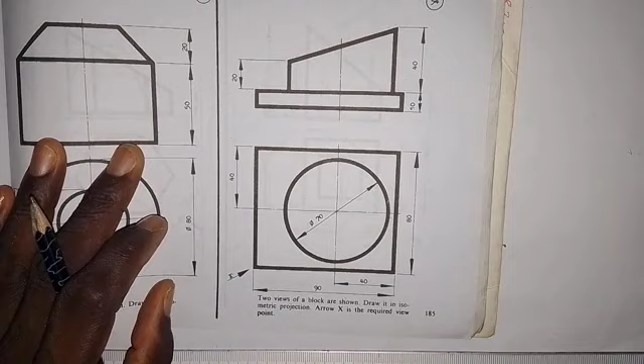Here I'm going to explain how you can construct the isometric view of this object, as we are given the orthographic views of the object. We are told that two views of a block are shown. Draw it in isometric projection. Arrow X is the required viewpoint.

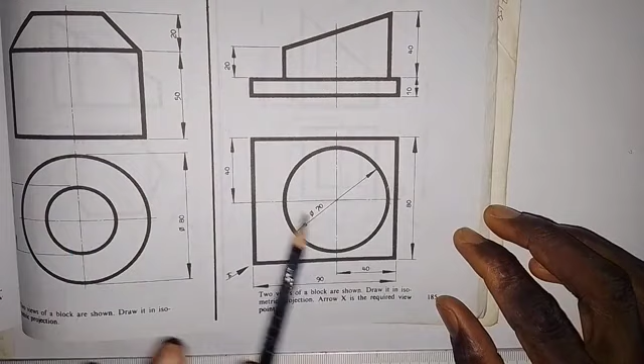So we are going to put this part together to get its isometric view as we are instructed. This is the front elevation, this is the plan. That means the views are given in first angle orthographic projection.

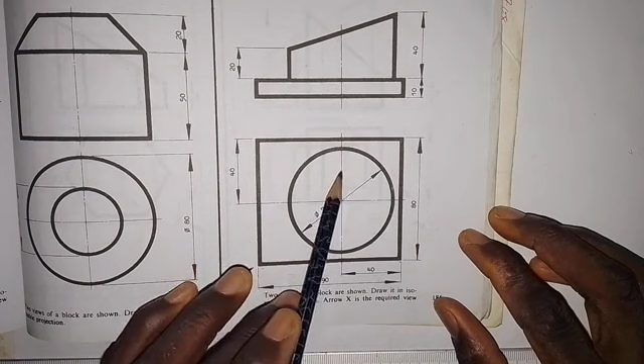Let's look at the dimensions. So in the plan, we have distance from here to here to be 80 millimeters, and from here to here is 90. The center line of this circle from this end is 40 millimeters. The center line of this circle on the horizontal part from this end is also 40 millimeters. So those are the dimensions that we have in the plan.

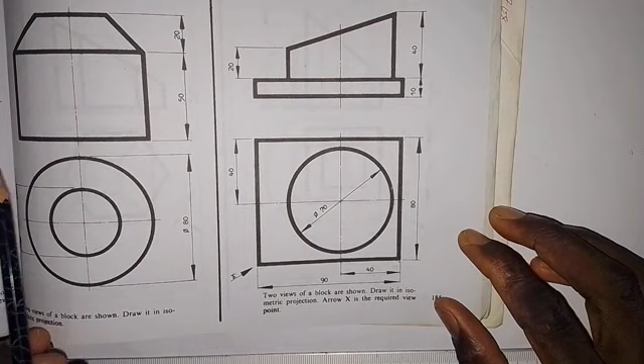The thickness of this is 10 millimeters, and distance from here to here is 40, from here to here is 20 millimeters. So we are going to put this part together to get its isometric view.

Now let's start. The first thing we need to do here is draw a horizontal line. Then we take our set square and draw a line in this direction, and turn to this side and draw a line in this direction as well. Then we turn like this and draw a short vertical line. So we are preparing the base first.

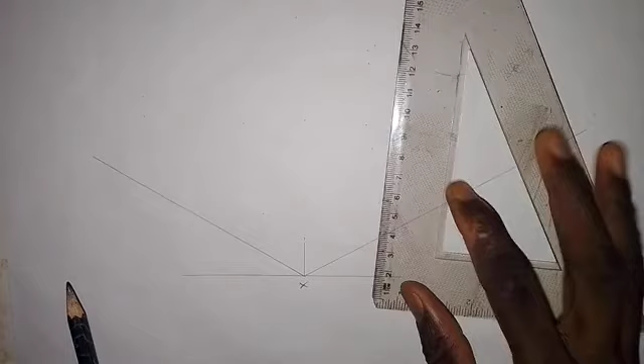So we take a measurement of 10 millimeters from this point. This is point X, which we are asked to take as the viewpoint. So we take a measurement of 10 millimeters up. And here we take a measurement of 90 millimeters from here. This is 90 millimeters.

Then here we also take a measurement of 80 millimeters from here. So this is 80 millimeters. Then we are going to draw a short vertical line at this point, and we also come here and draw a short vertical line at this point.

So then I will transfer this 10 millimeters to this side, like this, and then we also transfer it to this side from here like this. Then from this point we draw a line in this direction, and from this point we transfer this point to this end here. So we have drawn the base as we are given here.

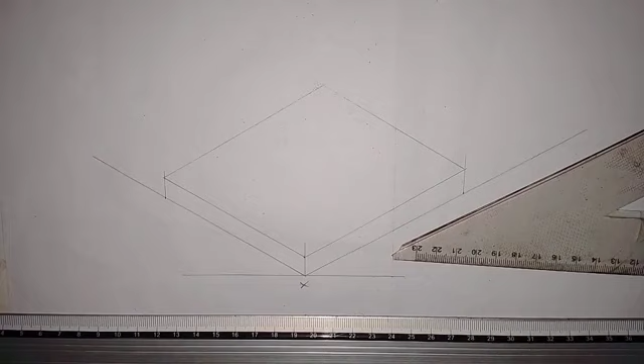Now let's prepare how we are going to draw the cylindrical part that is truncated. What we need to do now is take a measurement of 40 millimeters from this end. This is 40 millimeters. Then from this end here also we take 40 millimeters.

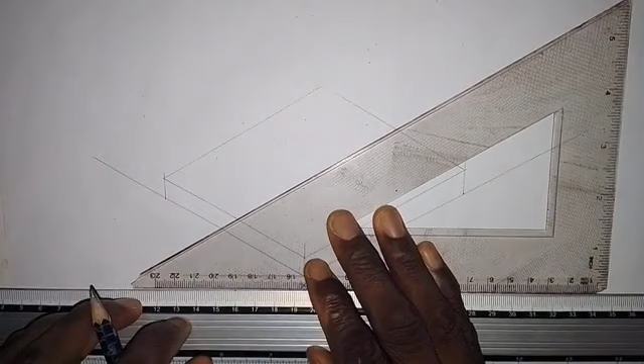This is 40 millimeters. So now we are going to draw a center line, from here to this end. Then we also do the same thing from here, where we have this 40, so we draw from here to this end here.

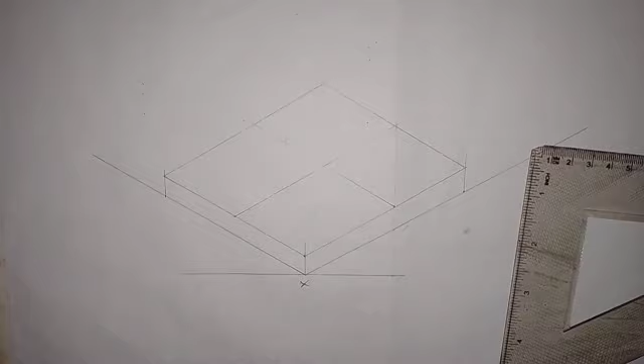Now for the cylindrical part, the circular base of the cylindrical part is 70 millimeters, that is, the diameter is 70 millimeters. So on this line here, we are going to take a measurement of 35 millimeters from here. This is 35 millimeters. So we also take 35 from here. This is 35 millimeters here.

Then we turn to this side and do the same thing. We take a measurement of 35 millimeters. So this is 35 millimeters. Then again from here, so this is 35 millimeters.

We are going to create an isometric square on this face. So look at the way I'm going to do it. We draw a line here, and then come here, we also draw a line. Then we turn it to this side.

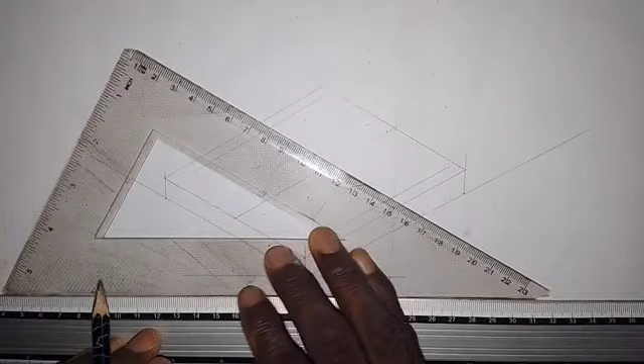So from here, we draw a line. Okay. Alright, so then coming to this side here. So from this point, we draw a line through this point. So we have the isometric square. So what we are going to do now, we connect the longest corners together.

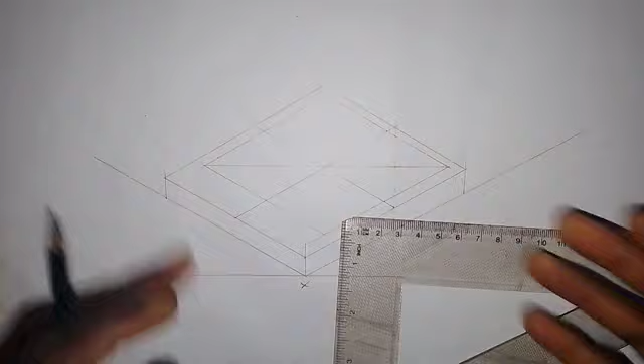So what I want to do here is to draw a part of the isometric circle at the base of that cylinder. So then we also connect this point here together with this point. So I will draw a line from here to meet this line, and then I will draw a line to connect this point and this point together, like this.

So the next thing that I'm going to do is to take my compass, setting it at this point. Because it is the lower part of the cylinder, I'm not going to draw the whole of the cylinder, but I'll just extend to this point here. Then I will draw an arc from here to here like this.

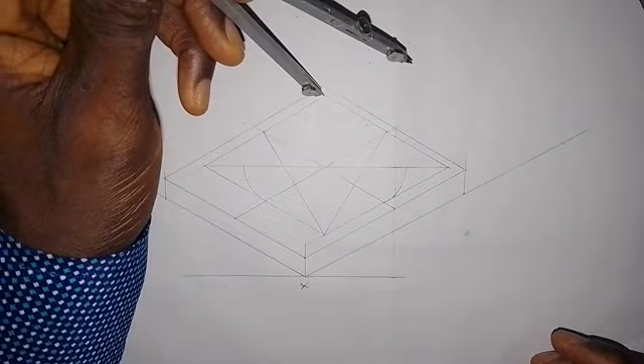Then I will also put it at this point just to touch the longest line. So I will also extend it here, and draw an arc just to touch this line, like this. Okay, then I will put it at this point here, extend it to this point here, and then draw an arc like this to connect these 2 arcs together. So this is the part of the base of the cylinder.

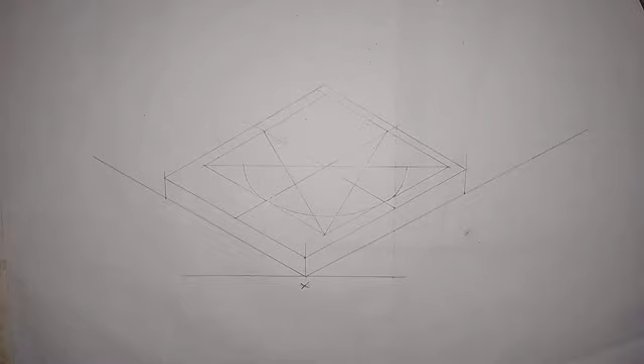So now, don't forget that the cylinder is truncated and we have it bent. Okay, so the upper part is 40. The part on this side is 40 millimeters from here to here, while on this side is 20 millimeters. So we are going to create something like that. So just look at the way I'm going to do it.

So what I'm going to do now is draw a vertical line at this point here, and also at this point I will draw a vertical line. So here at this point I will draw a vertical line, and at this point. So with these vertical lines that I've drawn, I'm going to take a measurement of 20 millimeters here. This is 20 millimeters, and this is also 20 millimeters.

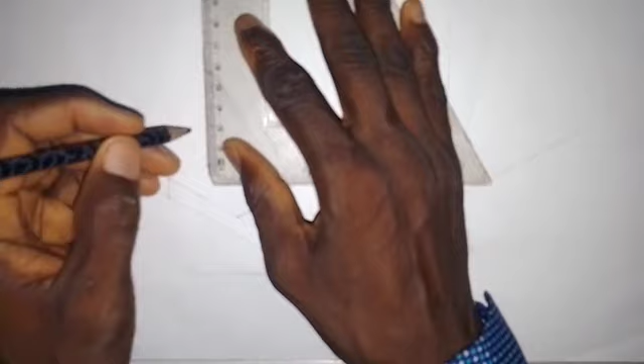This is 20 millimeters. So here I will take 40 millimeters from this point up. This is 40 millimeters. And at this point I will also take a measurement of 40 millimeters. So I'm going to connect these together. I'll connect these 2 points together like this, and also these 2 points together like this, and then I will connect these points together.

Okay, so if you look at what we have here, this is not a square anymore, because if we are to construct an isometric circle on an isometric object, we have to create an isometric square. So this is no more a square. So what we are going to do here to solve this problem is to create an isometric square on this face.

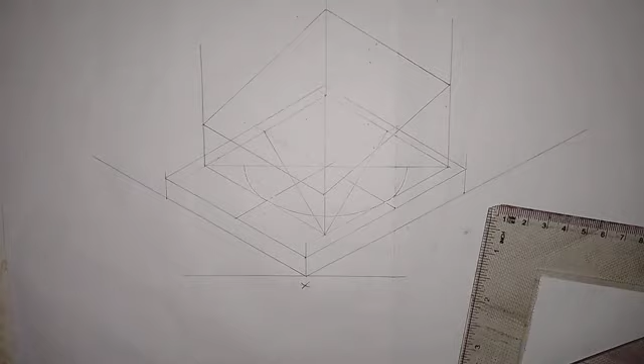So the length here is 70 millimeters. If you check, this is 70, and this is more than 70 now because of the slant. So what I'm going to do is that I will get the midpoint of this. This is the midpoint. Okay, so this is 40. Then I will come here also and get the midpoint, which is also 40 millimeters.

So then I'm going to connect these 2 points together like this. Okay, now the next thing I'm going to do is that I will divide this 70 into 2.

Divide this 70 millimeters into 2. That is 35 millimeters, and this is 35 millimeters. So coming here now, I will also get that same 35. This is 35 millimeters here. So I will connect these 2 points together like this. Connect these 2 points together here like this.

Okay, now, the next thing I'm going to do is take a measurement from here. I will take a measurement of 35 millimeters on this line. This is already from here now. From here, this is 35, this is 35. But here, I need to take 35, 35 here. So I'm taking 35 millimeters from this point.

So this is 1, 2, this is 1, 2, 3. This is 35 millimeters, like this. Then here also 1, 2, 3. This is 35 millimeters. So now I'm going to draw a line from this point. So I'll draw a line like this. Okay, I'm coming to this point here. I will also draw a line like this.

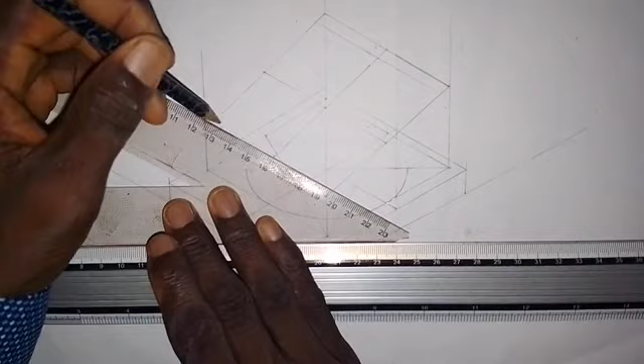Okay, so I've created an isometric square on this face. As you see it here, I've created an isometric square on this face. These are the ends that we have here, this point, and then we also have this point and this one. So what I need to do now is to connect the longest point together to draw a diagonal of these 2 points like this, as we did for the down one. So I'll connect these 2 points together like this.

Okay, so having done that, this point that we have here, I'll be connecting it together with this point. So this is it. So I'll connect this point to this point. So be very careful with the point. So I'll connect these 2 points together, and then I'll connect these 2 points together.

Okay, so we are using the 4 center method. So this is one of the points that we are using. So if I write 1 here, this is point 2. This point here will be point 3 or center 3, and this one here is center 4. So getting this now, I can go on and draw, putting the pinpoint of my compass here. Let me start from 2 here. So extending it to this point, I can draw an arc like this.

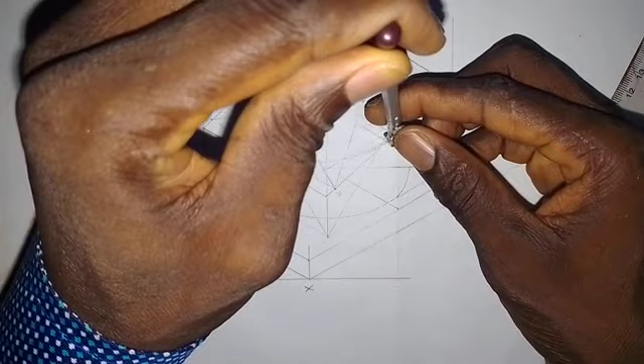Then next, I put center 3 here. Center 3, extending it to this point here. Then I will draw an arc from here to meet this point. Okay. Alright, so we have drawn that. So then I'll put center 4 here. This is center 4. So putting it here, I will draw an arc like this to meet this arc here like this.

Okay, so looking at what we have done here, I'm connecting these 2 points together like this, and also I will connect these 2 points together on the longest diagonal. So then the next thing that we are going to do is that I need to make this line a thick line. So like this, and this line also. So make it a thick line like this.

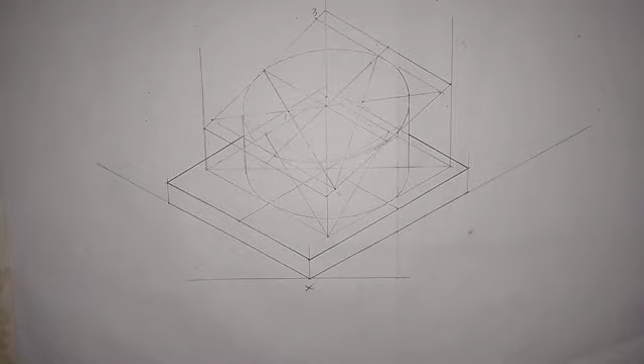Then this line also, make it a thick line. Okay, so make this line a thick line. Then make this line. So we take the line from here to here. Okay, so then we also make this a thick line. So this is how the object will look. So I also need to make this line a thick line, and this line a thick line.

Alright, so we are done. So this is how the object will look in its isometric form.